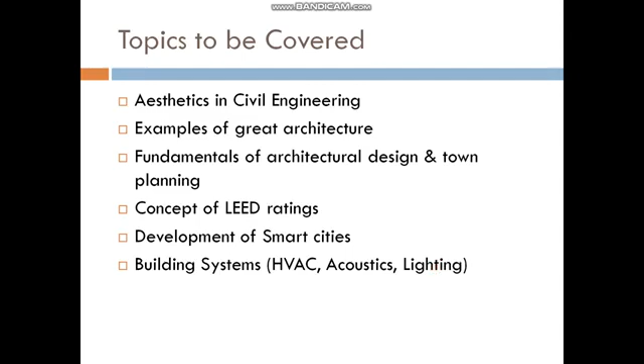Let us first have a look at the topics we are going to cover: aesthetics in civil engineering, examples of great architecture, fundamentals of architectural design and town planning, concept of LEED ratings, development of smart cities, and various building systems like HVAC, acoustics, lighting, etc. In our current lecture, we will mostly focus on architecture and issues related to architectural concepts in construction.

In architecture, aesthetic is an important aspect. So what does aesthetic mean? Basically, it is concerned with the beauty or the appreciation of beauty. The definition of aesthetic is being interested in how something looks and feels. An example of someone who is aesthetic might be an artist. Aesthetic means the pleasant, positive, or artful appearance of a person or a thing. An example of the word is to say that a particular car is beautiful.

What does aesthetics mean in engineering? Aesthetics is the philosophical study of beauty and taste. The term stems from the Greek word aesthetikos, meaning of sense perception, and it is related to the study of sensory values. In design, aesthetics refers to the visual attractiveness of a product. It is often mistakenly associated with surface beauty rather than being defined as having to do with feelings. When aesthetics is understood as having to do with overall perceptions of quality, it becomes obvious that most engineering decisions affect the aesthetics of a product.

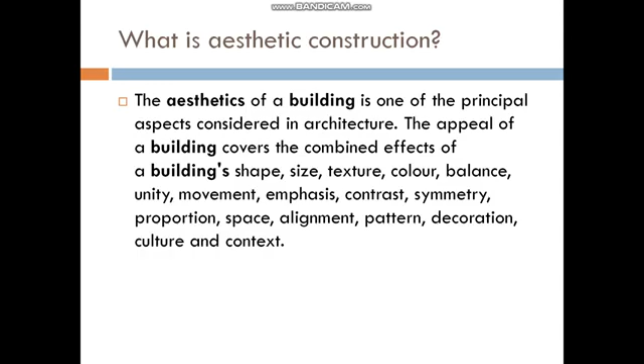So we have understood what aesthetic means, but we need to understand how it is related to construction, as we are civil engineers. Basically, the aesthetics of a building is one of the principal aspects considered in architecture. The appeal of a building covers the combined effects of its shape, size, texture, color, balance, unity, movement, emphasis, contrast, symmetry, proportion, space, alignment, pattern, decoration, culture, and context.

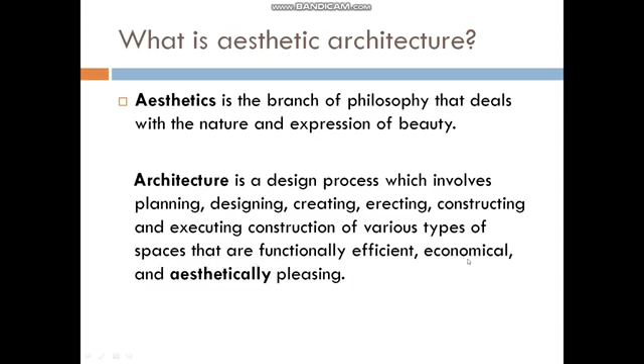Being a civil engineer, we need a clear idea of aesthetic construction. In view of this, we need to know what aesthetic architecture is, meaning what is the relation between aesthetic and architecture. As we have already gone through, aesthetics is the branch of philosophy that deals with the nature and expression of beauty. How does it relate to architecture? Because architecture is a design process which involves planning, designing, creating, erecting, constructing, and executing construction of various types of spaces that are functionally efficient, economical, and aesthetically pleasing.

So now we know that principles of architecture are used to make a structure aesthetic, meaning beautiful. So how can a structure be used for aesthetic purpose? The answer is, a structure should have a pure, clear, preferably simple form and bring a feeling of stability. Its form should also correspond with the materials used.

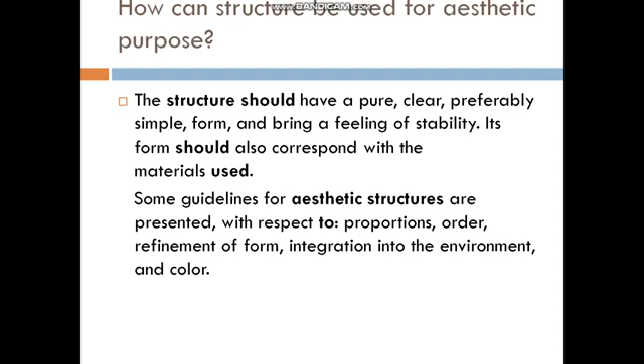Some guidelines for aesthetic structures are presented with respect to proportions, order, refinement of form, integration into the environment, and color. So in order to make a structure aesthetic, we need to apply these guidelines, meaning we should follow them to use a structure for aesthetic purpose.

So what are the aesthetic considerations we should apply in architecture for the construction of a structure? The aesthetic considerations are as follows: line, shape, size, texture, color, balance, unity, movement, emphasis or contrast, symmetry, space, alignment, culture, context. An architect should follow these aesthetic considerations for the construction of new structures to make them more beautiful or aesthetic.

So we can understand that aesthetic is an integral issue in the architectural process for constructing structures. Being a civil engineer, our job is not only to make a structure functional and serviceable, but also we should consider the aesthetic aspects of the structure. Now let us look into some examples where you can see the application of aesthetics in the architecture of a structure.

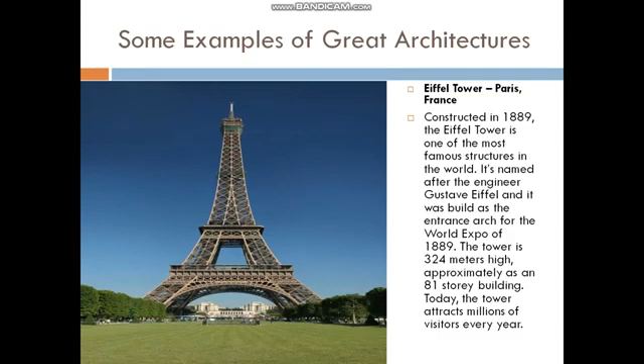Not only this, but we have some more examples to show which actually depict the importance of aesthetics for a structure.

The first one is the Burj Al Arab, situated in Dubai. It is built on an artificial island 280 meters away from the coast, and it is one of the most luxurious and fourth tallest hotels in the world. It is 321 meters high and represents one of the wonders of contemporary engineering. The building was designed by Tom Wright of famous WKK architects, and its shape emulates the shape of a ship's sail.

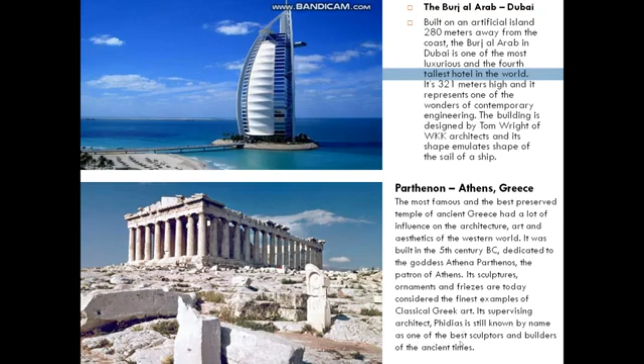The second one is the famous Parthenon, situated in Athens, Greece. The most famous and best preserved temple of ancient Greece, it had a lot of influence on the architecture, art and aesthetics of the Western world. It was built in the 5th century BC, dedicated to the goddess Athena Parthenos, patron of Athens. Its sculptures, ornaments and friezes are today considered the finest examples of classical Greek art. Its supervising architect, Phidias, is still known by name as one of the best sculptors and builders of ancient times.

The next one is the famous Petronas Towers, the famous twin towers of Kuala Lumpur in Malaysia. These twin towers were the tallest buildings in the world from 1998 to 2004, and still are the tallest twin buildings in the world. Their complex and super modern design actually initiated the construction of postmodern Kuala Lumpur.

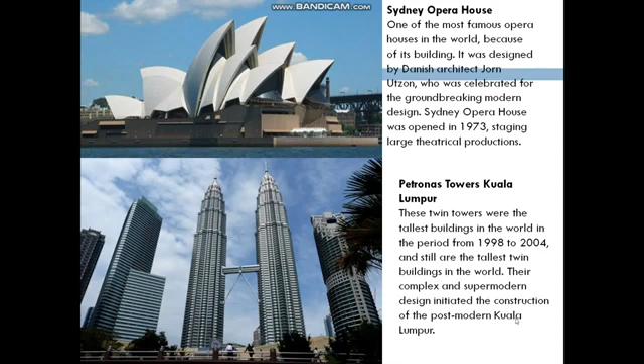The next one is the famous Flatiron Building of New York. This is a classic example of the groundbreaking triangular solution of early modern architecture. The Flatiron Building was designed by Mr. Daniel Burnham and completed in the year 1902. This New York landmark was the tallest building in the world at the time it was completed.

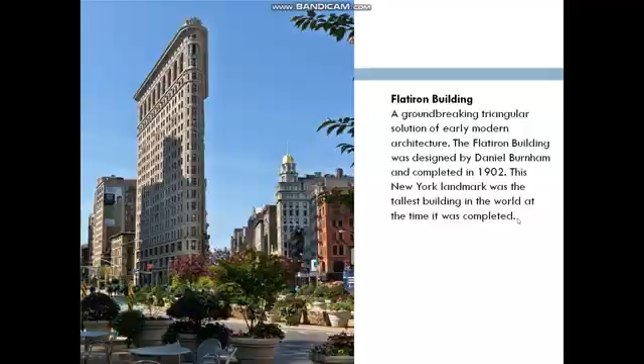So, from all of the examples we have mentioned here, it shows that aesthetics is an integral part of a structure and how important this is. Being a civil engineer, it should be our objective to make a structure not only functional and serviceable for a long time, but also to put effort into making it aesthetically pleasant and beautiful.

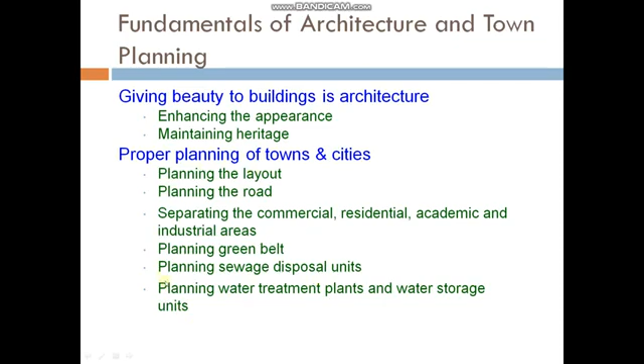So these are the major fundamentals of architecture and these are the major fundamentals of town planning. Now let us have some idea regarding town planning. So what is town planning?

Town planning basically is an arrangement of various components or units of a town in such a way that the town as such attains the significance of a living organism. The knowledge of town planning helps in achieving the best possible advantages of the situation of town with respect to its land and the surrounding environments.

Town planning is a science as well as an art, and this art lies in arranging the components of a town in such a way that the final result is in the form of a beautiful, convenient, economical and efficient unit. So from this discussion, we can understand why town planning is important.

It is important because planning looks at the needs of people and the environment whilst respecting limits to development. Urban planning must recognize the regional limits to development in order to maintain natural habitats and biodiversity, which is so important to our continued existence.

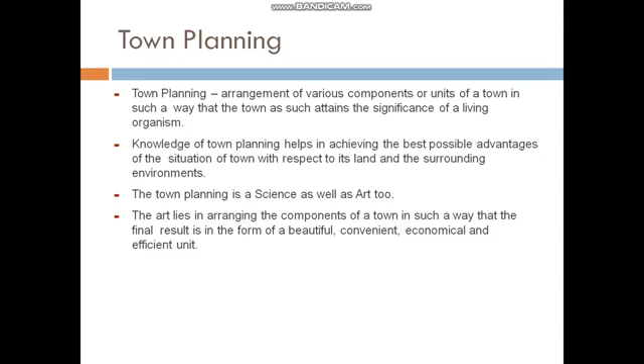So the objectives of town planning are, that means what do we achieve by applying the principles of town planning? Those are beauty, convenience, environment, and health.

The first objective of town planning is to achieve beauty. And how do we achieve it? The potential of the natural surroundings is exploited and architectural finishes are used to design various components of the town. The trees and natural greenery are preserved.

Architectural control is imposed on public as well as semi-public buildings, on ancient architectural buildings, on temples, churches, mosques, and on buildings of cultural and historical significance. This is how we can achieve beauty by applying the principles of town planning.

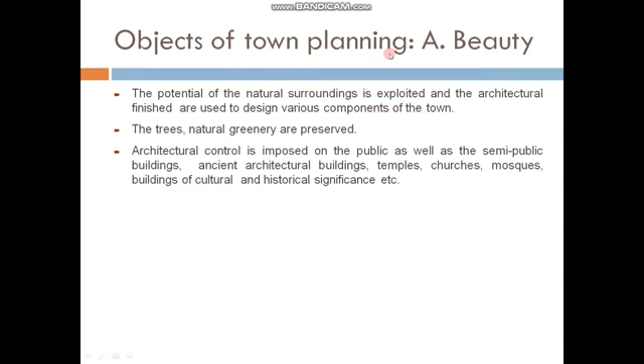The second objective of town planning is to achieve convenience. And how do we achieve convenience? Various economic, social, and recreational amenities should be provided to the public.

These amenities include cheap power and electricity, proper sites for dumping industrial wastes, and facilities to commercial units. Recreational spaces are very important to be designed and appropriately located. Places of recreation include open spaces, parks, town halls, playgrounds, cinema houses, community centers, stadiums, etc. This is how we can achieve convenience by applying the principles of town planning.

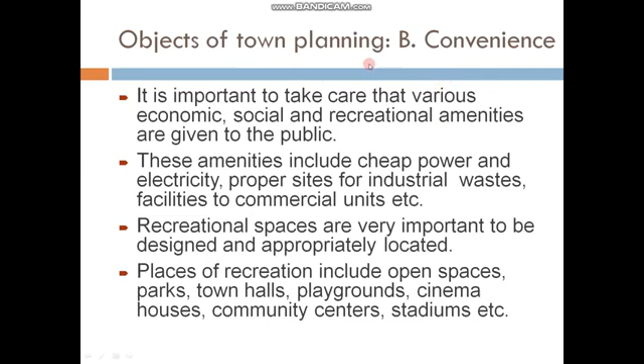The third objective of town planning is to build a proper environment for the residents of the town. And how do we achieve this? The towns should be designed in such a way that environmental factors are taken into consideration, so that people living in the town can carry on their daily activities without putting in much effort.

Problems evolved with the rise in tiresome travel to work, long hours of work, and limited time spent within the community. In this regard, we should remember that these maladjustments have tended to destroy the vitality of urban living, and town planning is mainly concerned with bringing about a better relation between man and his environment.

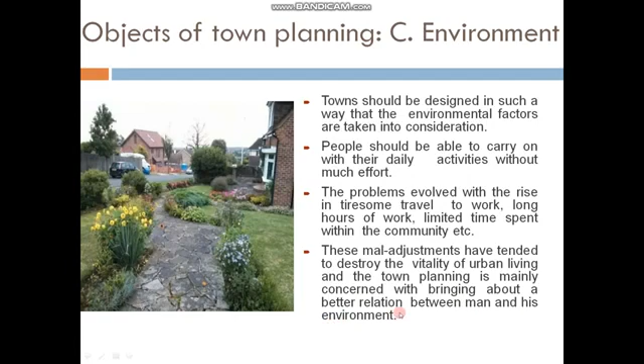The fourth and last objective of town planning is to provide proper health to the citizens of the town and to maintain hygiene of the town. And how can we achieve this? The health of the citizens should never be compromised.

To maintain this, the land of the town should be divided into zones such as residential, commercial, industrial, recreational, etc. Dividing the land into different zones prevents encroachment of one zone upon another and promotes orderly development of the town in the near future.

We have discussed the various objectives of town planning, and from this discussion it is clear that if we can achieve these objectives, it will be very easy to implement the proper principles of town planning for constructing a new town or developing an existing one.

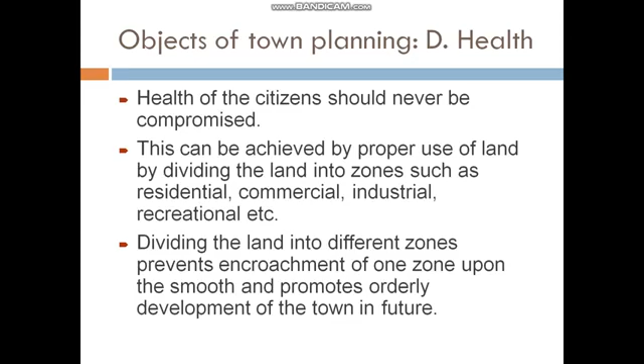So now the big question is why town planning is important, that means what are the necessities of town planning? The answer is to avoid certain evil situations within a town or a city.

Evil situations mean a defective road system resulting in the formation of narrow streets and lanes, development of slums and squatter settlements, and heavy traffic congestion during the working hours of the day.

Other evils include inadequate open spaces for parks and playgrounds resulting in unhealthy living conditions, lack of essential amenities like electricity, water supply, and drainage, noisy atmosphere disturbing the peace of city dwellers, and uncontrolled development of the town leading to unhealthy living conditions.

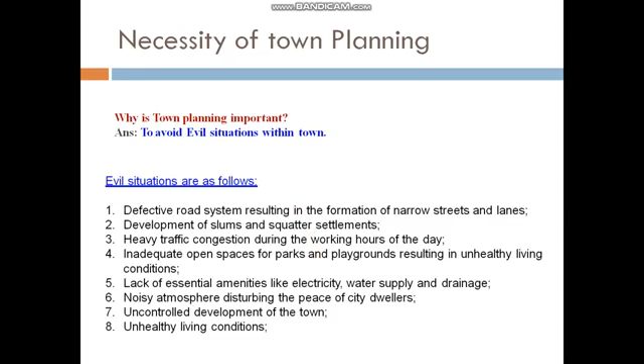So, to avoid these evil situations, a proper town planning is required. In view of the discussion regarding town planning, smart city is a very new concept. So basically, what is a smart city?

The answer is there is no universally accepted definition of a smart city. It means different things to different people. The conceptualization of a smart city therefore varies from city to city and country to country, depending on the level of development, willingness to change and reform, resources, and aspirations of the city residents. A smart city would have a different connotation in India than, say, Europe. Even in India, there is no one way of defining a smart city.

Some definitional boundaries are required to guide cities in the mission. In the imagination of any city dweller in India, the picture of a smart city contains a wish list of infrastructure and services that describes his or her level of aspiration. To provide for the aspirations and needs of the citizens, urban planners ideally aim at developing the entire urban ecosystem, which is represented by the four pillars of comprehensive development, that is, institutional, physical, social, and economic infrastructure. This can be a long-term goal, and cities can work towards developing such comprehensive infrastructure incrementally, adding on layers of smartness.

In order to understand the definition of a smart city, we need to have an idea of its features. So, the smart city features are as follows. The first one is promoting mixed land use in area-based developments, that is, planning for unplanned areas containing a range of compatible activities and land uses close to one another in order to make land use more efficient. The states will enable some flexibility in land use and building bylaws to adapt the changes.

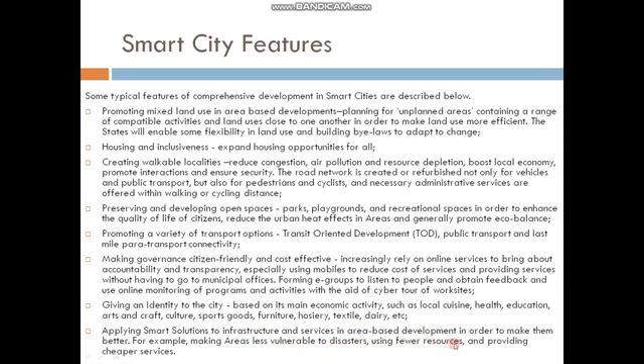The next important smart city feature is giving an identity to the city, that means based on its main economic activity such as local cuisine, health, education, arts and craft, culture, sports goods, furniture, hosiery, textile, dairy, etc. The last important feature of smart city is applying smart solutions to infrastructure and services in area-based development in order to make them better. For example, making areas less vulnerable to disasters, using fewer resources, and providing cheaper services.

Now, let's have a look at the Smart City mission of India. Government of India plans to develop 100 smart cities by the end of 2020. The Smart City Mission will be operated as a centrally sponsored scheme, and the central government proposes to give financial support to the mission to the extent of rupees 48,000 crores over 5 years, that is on an average of rupees 100 crore per city per year. An equal amount on a matching basis will have to be contributed by the state. Therefore, nearly rupees 1 lakh crore of government funds will be available for the development of smart cities.

Construction of green building is the latest application of architectural concept. In this regard, LEED rating system is an important aspect. The leadership in energy and environmental design, that is LEED system, was designed by the United States Green Building Council to evaluate the influence of building design and construction on the environment. The LEED rating system has 7 areas of concentration, and those are sustainable sites, water efficiency, energy and atmosphere, materials and resources, indoor environmental quality, innovation in design process, and regional priority.

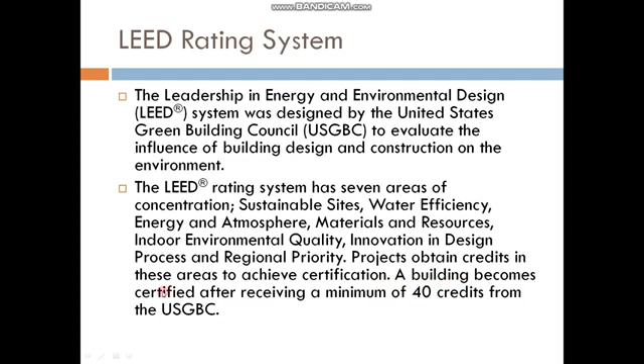For sustainable sites category, the maximum available points is 26. For water efficiency category, the maximum available points is 10. For energy and atmosphere category, the maximum available point is 35. For materials and resources category, the maximum available points is 14. For indoor environmental quality, the maximum available points is 15.

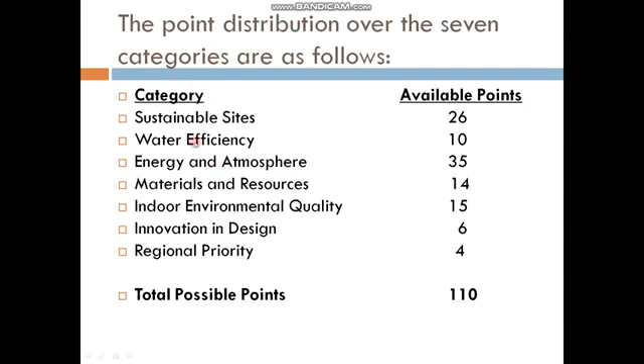For innovation in design category, the maximum available points is 6. For regional priority category, the maximum available points is 4. So together, the maximum available points that can be achieved is 110. Basically, all of these categories are scrutinized very efficiently in order to certify a building as per the LEED rating system.

One point should be remembered: a building becomes LEED rating system certified only after receiving a minimum of 40 credit points from USGBC, that is United States Green Building Council. After thoroughly evaluating all the categories, if a building gets credits between 40 and 49 points, then the building is certified as LEED certified. As I have already mentioned, the minimum points to be achieved is 40.

If a building achieves a credit point between 50 and 59 points, then the building is certified as silver level from the LEED rating system. And if a building achieves a credit point between 60 and 79 points, then the building is certified as gold level from the LEED rating system.

Whereas in order to achieve platinum level certification, a building has to get 80 plus credit points from the LEED rating system. A building is awarded with any one of the certification levels only after a thorough and detailed investigation of all 7 categories associated with the LEED rating system, and this detailed investigation of each category is very important for the LEED rating certification of a building.

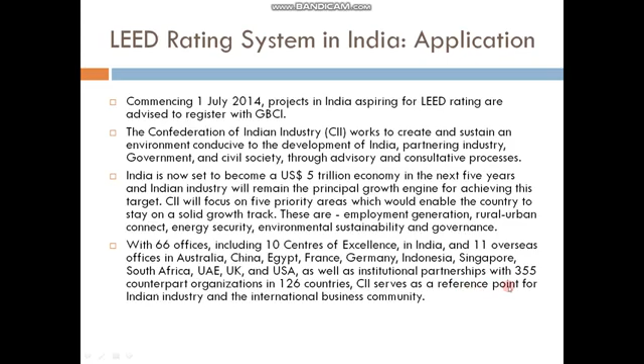CII will focus on 5 priority areas which would enable the country to stay on a solid growth track: employment generation, rural-urban connect, energy security, environmental sustainability, and governance. With 66 offices, including 10 centers of excellence in India and 11 overseas offices in Australia, China, Egypt, France, Germany, Indonesia, Singapore, South Africa, UAE, UK, and USA, as well as institutional partnerships with 355 counterpart organizations in 126 countries, CII serves as a reference point for Indian industry and the international business community.

The green building movement in India was triggered off when CII Sorabji Godrej Green Business Center building in Hyderabad was awarded with the first and most prestigious platinum rated green building rating in India. Since then, the green building movement in India has gained tremendous impetus over the years.

With a modest beginning of 20,000 square feet of green built up area in the country during the year 2003, today more than 5,894 green building projects are coming up with a footprint of over 7.16 billion square feet registered with the Indian Green Building Council, that is IGBC, out of which 1995 green building projects are certified and fully functional in India. This growth has been possible with the participation of all stakeholders in the green building movement.

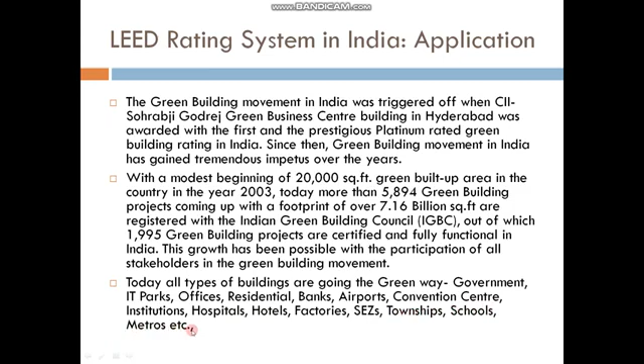Today, all types of buildings are opting the green way: government buildings, IT parks, offices, residentials, banks, airports, convention centers, institutions, hospitals, hotels, factories, townships, schools, metros, etc. Heating, ventilation and air conditioning system, that is the HVAC system, is an integral part of modern day building technology. This system provides heating and cooling to residential and commercial buildings.

You can find HVAC systems anywhere from single family homes to submarines, where they provide the means for environmental comfort, becoming more and more popular in new construction technology. These systems use fresh air from outdoors to provide high indoor air quality.

The V in HVAC system, or the ventilation system, is the process of replacing or exchanging air within a space. This provides better quality air indoors and involves the removal of moisture, smoke, odors, heat, dust, airborne bacteria, carbon dioxide and other gases, as well as temperature control and oxygen replenishment.

So how does an HVAC system work? The three main functions of an HVAC system are interrelated, especially when providing acceptable indoor air quality and thermal comfort. Your heating and air conditioning system is often one of the most complicated and extensive systems in your home, but when it stops working, you will know soon enough.

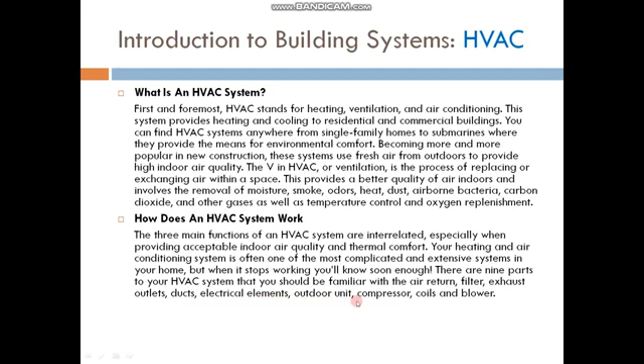There are 9 parts to your HVAC system that you should be familiar with: air return, filter, exhaust outlets, ducts, electrical elements, outdoor unit, compressor, coils and blower.

Another important building system is acoustics. Acoustics is the study of physics of sound. Acoustics in buildings concerns the controlling of quality and amount of sound inside a building. It is used to allow for pleasant sound in a concert hall and to reduce echoes and noise within an office building. Acoustics also concerns suppressing sound coming from outside the building, such as in apartments.

Building acoustics are an important consideration in the design, operation and construction of most buildings and can have a significant impact on health and well-being, communication and productivity. They can be particularly significant in spaces such as concert halls, recording studios, lecture theatres, and so on, where the quality of sound and its intelligibility are very important.

Building acoustics can be influenced by certain factors: one, the geometry and volume of a space. Two, the sound absorption, transmission, and reflection characteristics of surfaces enclosing the space and within the space. Three, the sound absorption, transmission, and reflection characteristics of materials separating the spaces. Four, the generation of sound inside or outside the space. Five, airborne sound transmission, and six, impact noise.

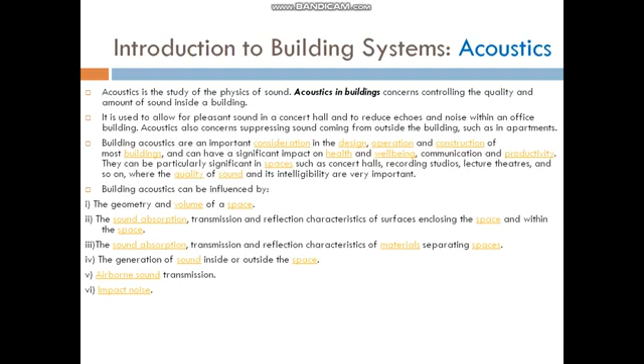Another important aspect of building systems is the lighting system. Generally, we use artificial lighting for this application, but artificial lighting uses a lot of energy in our homes and workplaces. In a typical home, lighting will account for about 10% of the total electricity use. In an office, it can be even 30% or more.

In a lighting intensive retail environment, it could be more than 50%. For small commercial tenants who only pay for light and power, it could be as much as 70% of the total electricity costs. Inefficient lighting also gives off a lot of heat, increasing the energy needed for air conditioning.

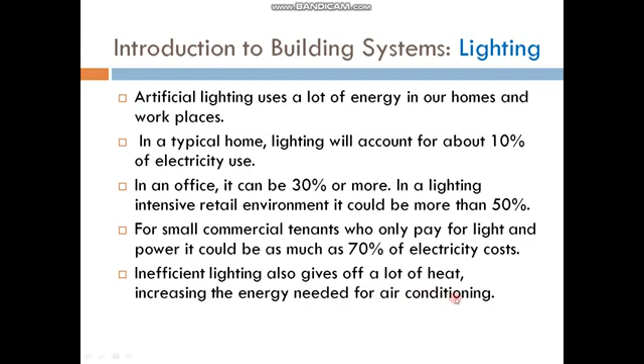In order to avoid the complexity of the use of artificial lighting, the one and only solution is the use of the right amount of light. Here, we have mentioned the recommended values of illumination, which are applicable for different portions of the building.

For corridors and walkways, the recommended illuminance should be around 40 lux. Whereas in interiors where lighting is used intermittently, like change rooms, lever areas, storage areas, loading bays, and stairs, the recommended illuminance is around 80 lux.

For staff canteens, entrance halls, etc., the recommended illuminance is around 160 lux. For continuously occupied areas with easy visual tasks such as reading, writing, typing, for inquiry desks and libraries, the recommended illuminance is around 240 lux.

For routine office tasks of reading, writing, typing, inquiry desks, and libraries, the recommended illuminance is around 320 lux. For intensive work like drawing boards, town planning, and inquiry counters dedicated to viewing paper plans, the recommended illuminance is around 600 lux.

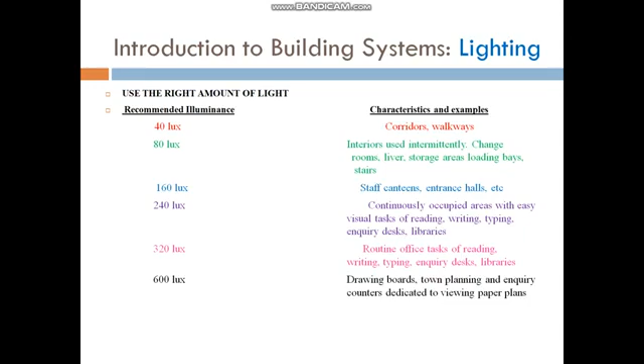We can see that proper use of lighting as required for various applications can actually save a lot of energy, and this is an important aspect for the concept of energy saving as applicable for a building in terms of its functionality. From the discussion we have done in this lecture, it is clear that the proper application of design, aesthetics, planning, lighting, and acoustics are very important for the proper function of a building.